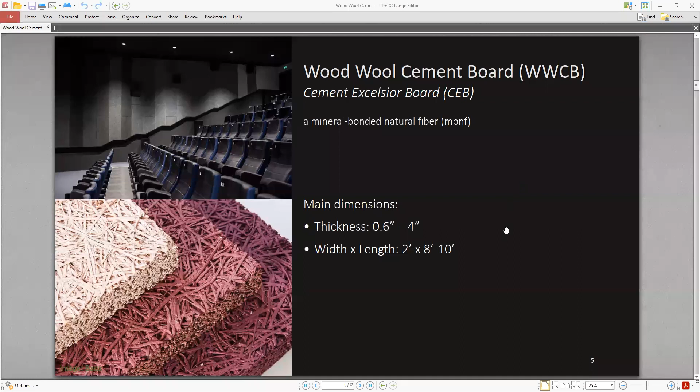The inputs, what goes into the product, are very simple. It's just these wood strands, ordinary Portland cement, and water, and that's pretty much it. It uses small diameter trees between 4 and 11 inches, and the length between 6 and 15 feet. So it's all material we have in vast abundance of, and often don't know what to do with it.

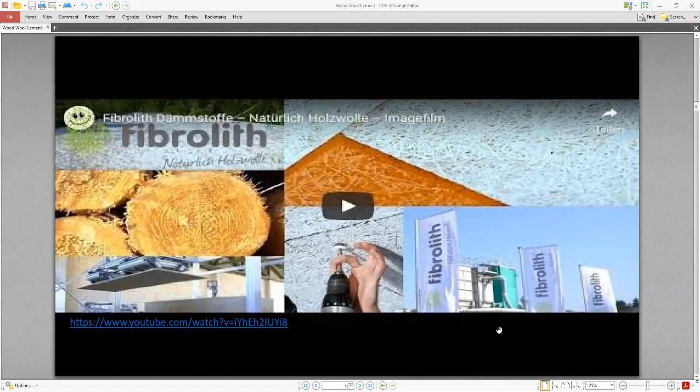There is a nice YouTube video, I'm not going to play this now, I'll probably put the link in the chat box later. It's from a German company, but there's no text, it is all subtitled, and it'll show you the process a little bit.

These are some slides showing what goes in and what comes out. Starting top left, the logs are delivered. As you can see, it's a cut-to-length method, which is the most common method used in Europe. The whole tree isn't as much of a thing there.

Then it goes through a debarker, and the logs get stored out in the yard for another 6 months or so, not only for humidity and moisture content to adjust, but for tannins and sugars to settle and cure, because that affects the binding with the cement.

After 6 months, it goes back to a factory, gets cut into these 2-foot long pieces, and goes into a shaving mechanism, and this wool-like material comes out. Maybe you've seen it as packing material - sometimes fancy wine bottles are cushioned with this rather than plastic popcorn or newspaper. So that's where many people here have seen it before.

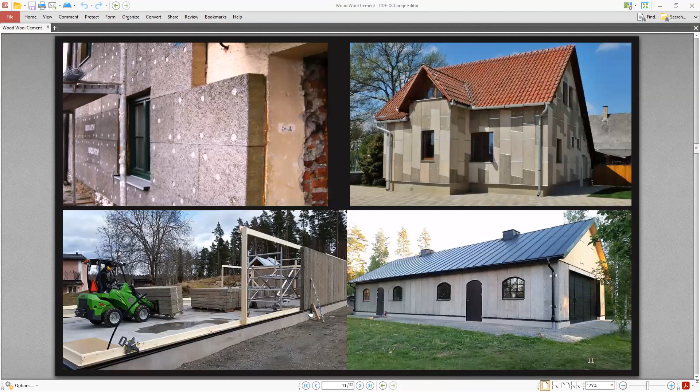Another application is on the exterior. The top row is a remodel of a building, I think 150 years old, that needed to be retrofitted and upgraded in terms of energy efficiency. They used these panels and added some EPS foam for additional insulation, just put it on the outside as siding. Because these individual wood strands are encased in cement, that's what makes them water resistant.

That's why it can be applied to the outside of a building without any other siding. The lower part - they built a whole structure, more a garage than anything, just out of these 4-inch or 6-inch thick panels.

Here are some properties I mentioned earlier. The thermal insulation R-value is 1.87 per inch. It has a relatively high specific thermal capacity, which means thermal inertia - if a space heats up, or if you use it in a building and the outside gets hot, it takes a longer time for this material to warm up or for the heat to get inside the building.

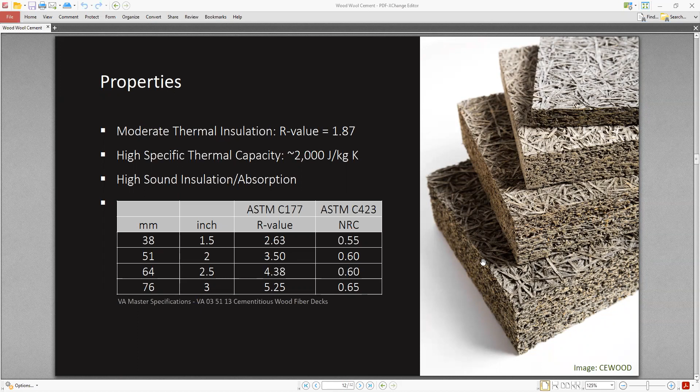So these were the thin panels up to 4 inches. Then a manufacturer in Sweden developed full wall elements. If you're familiar with how CLT panels look, how they're made, assembled, and how they end up on a construction site, this looks very familiar, right? These panels are cast at the factory and then transported to the site and assembled - between a foot and over 1.5 feet thick, length up to 20 feet, and width between 9 and 10 feet.

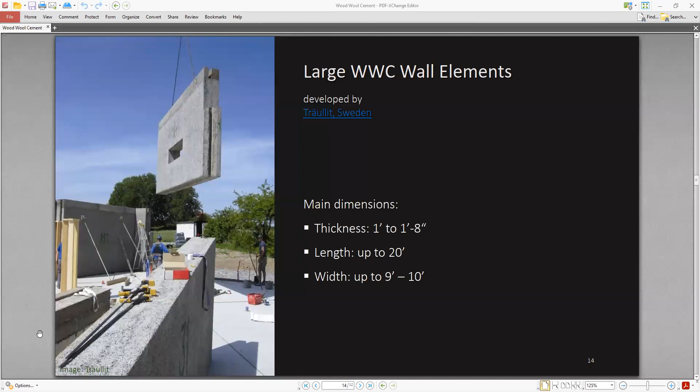This is what it looks like. Again, if you've seen CLT panels, or SIP structurally insulated panels - that's the sandwich of plywood with EPS foam in between - these elements just get delivered to the site and then assembled. So you can have a building on a foundation within 48 hours, with a roof on it. This is how it comes together. I don't know if you can see my mouse pointer here.

So these are the panels, and this gray bar at the top and these columns, that is concrete. When architects and engineers spec these buildings, they base their entire load calculations just on this concrete ring beam and the concrete columns. So they don't assign any structural load-bearing value to the panels themselves, which should make it easier for engineers to spec these things, and hopefully getting it through building codes in the US, because concrete is a common material people know here. So it's designed based on the concrete, and the panels are calculated just as thermal and acoustic insulation, but they have many more properties.

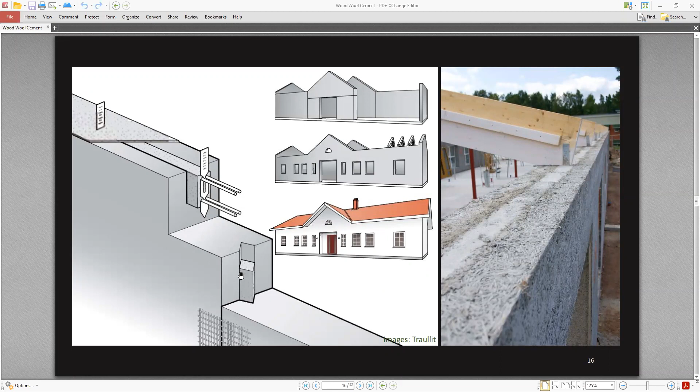This is, again, how things go together. Top left, that's a building where the wall elements are what we just saw, and then there are roof boards as well. You can see little dowels with the red dot in the middle. In that combination, they reach a 54 pounds per square foot roof load capacity. That's a lot. They had this example of Mr. Gobi, the elephant - they put him on there, almost 4,000 pounds, put on one of these roof boards, and it held up.

So for places that have high snow loads - we don't get it much here, but my friends up in Montana do. If we go up in the Sierra Nevada here, up to Truckee, they get multiple feet of snow every winter. So you have a product that can make up the walls as well as the ceiling and the roof. The span between the rafters is not the 16 or 24 inches we have in conventional construction - that's between 6 and 8 feet. So it comes together much faster.

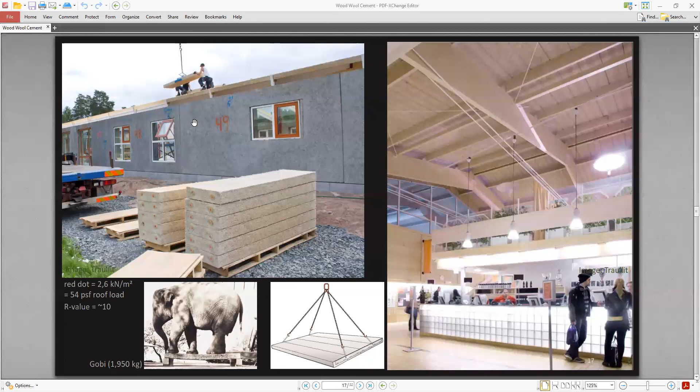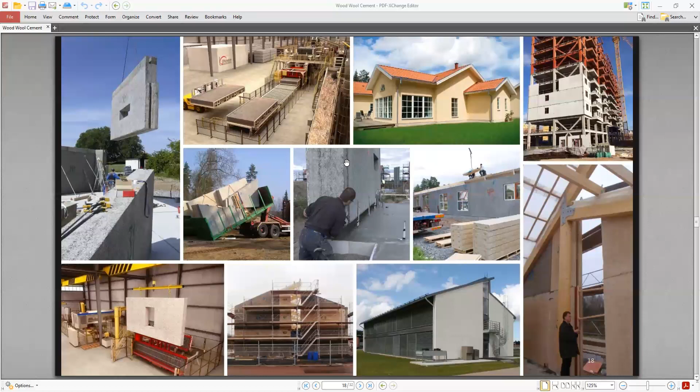A few properties - because the wall elements do not exist here, I had to borrow some fire classifications from Europe and Canada. But it is fire resilient. The flame spread index and the smoke developed index - these are ASTM US standards - and they tested these ceiling and wall panels for fire resistance.

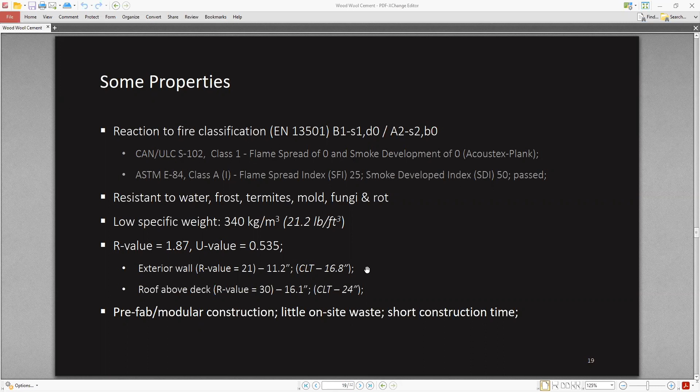I added some for comparison at the bottom there, the R value again, and this, looking at the California Title 24, that's the building energy efficiency code - an exterior wall with this material would be 11 inches thick. If you want to do the same wall with CLT, it would be almost 17 inches. So if you want to use a lot of wood, that might be a good thing. But again, CLT utilizes mostly mature timber rather than the 4 to 6 inch or 4 to 11 inches diameter material.

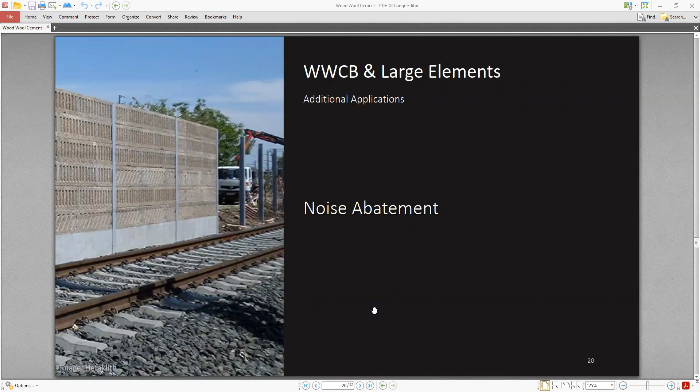So that was the whole building, residential and office building application. But they use it for noise abatement as noise barriers along highways as well. That's the stuff you see when you drive along the highway and there's a town behind it, and you don't want to create too much nuisance for them with the noise from the highway, or in this case, a railroad. That's when they built these walls, in all sorts of shapes and sizes and applications. Again, because it's cement coated, because it's water resilient and weather resistant, that's why they can put it in between the railroad tracks to mitigate noise.

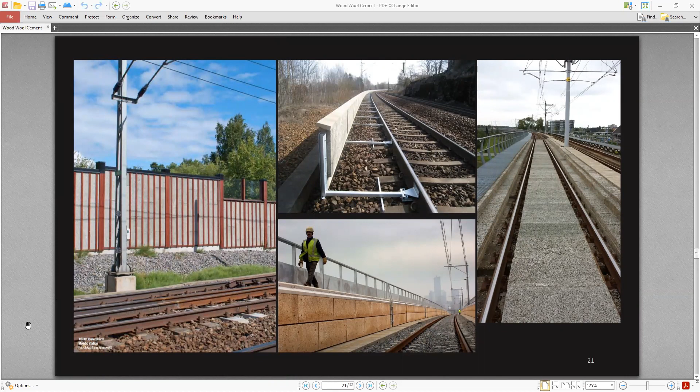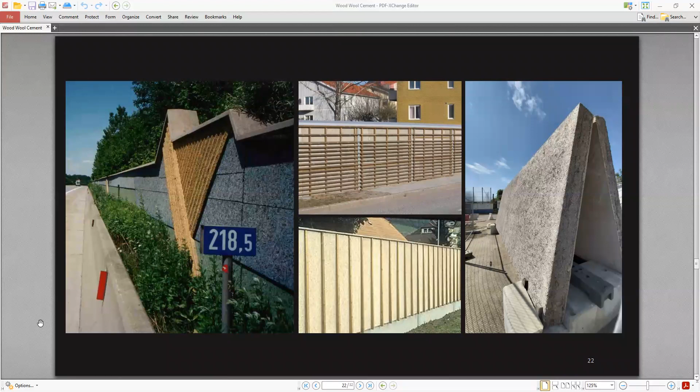Just a few more examples - again, one can go fancy on design. On the right side, this A-frame or A-shaped example - this is fairly new. That's a contractor in the Netherlands that has developed this concept. He's about to patent it right now. So based on that, some more examples.

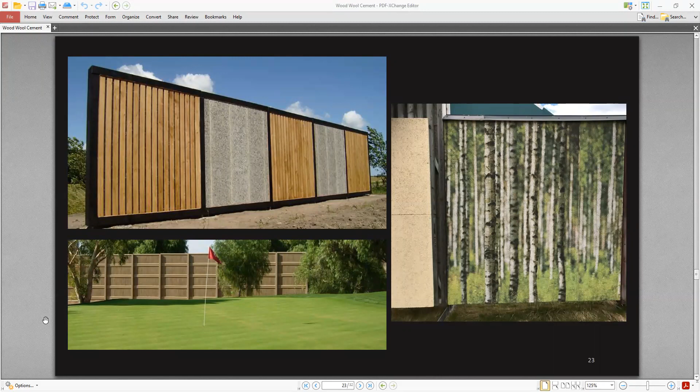So I did some math and thought, well, California installs about almost 60,000 linear feet of noise barriers every single year. Based on these calculations, a plant running at full capacity with one shift could produce all these panels in one year.

Now, when I bring this material up to people, they often say, well, cement is bad. I said, well, cement is not bad. I know cement has a high carbon content, emission content, because it takes a lot of energy in cement kilns to make the cement. Is it? Yes, that's true, but it depends on where that energy comes from. Does it come from coal? Does it come from gas? Does it come from solar and wind?

Then that equation changes. In the context of this comparison, right now the entire 60,000 linear feet of noise barriers in California are built out of solid concrete blocks. So if we can substitute some of that cement, some of that concrete with locally grown overabundant small tree material, still add some cement to it, we can have a similar effect, maybe even better, because these walls do not bounce off noise as regular concrete walls do.

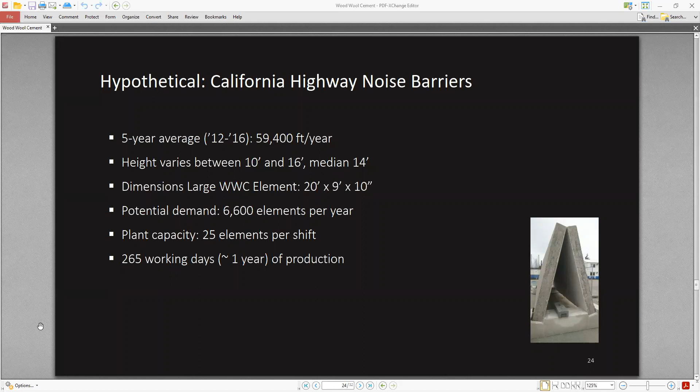So that's one of my pitches with them - I'm talking with Caltrans here, the Department of Transportation, to consider that, trying to find markets for this product.

How much goes into a plant? Not a whole lot. And when I talk to Forest Service people, they would rather see a plant that takes in 100,000 tons a year. I said, yeah, that's not this.

It takes about 20 tons of wood per day per shift, so over a year that's about 6,000 tons. It's peanuts, it barely makes a dent. But I think with that size, it might lend itself to be more distributed into smaller communities and closer to the source. You don't have to have a centralized plant where you have to ship a lot of material in, but you could have this more distributed setup.

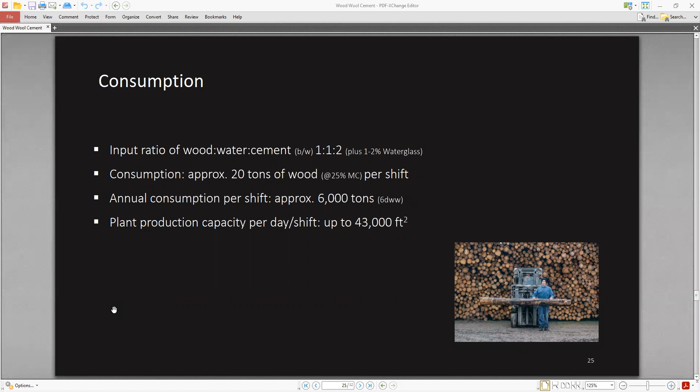So they have these documents. For some reason, they do not exist to that extent for similar materials here. So if you look for an EPD for CLT, for example, they usually just go to the factory gate, and they do not encompass the whole chain from production to the end of the life cycle. Where does the material go and what happens? Transportation costs, emissions, installation, and such.

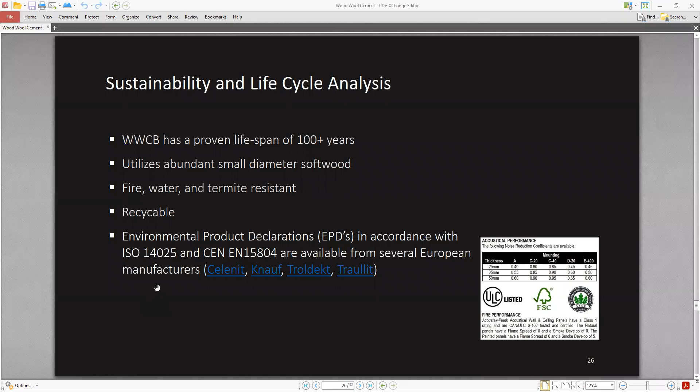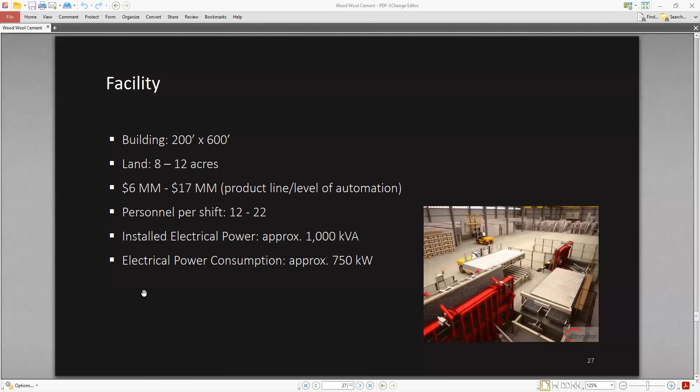So where does that tie into a variety of the issues we're dealing with in this group and on the state level? One is resilient forests and landscapes, because it does utilize underutilized small diameter trees, community hardening, home hardening. As I mentioned before, this material is fire resilient, not fireproof, but fire resilient.

For the economic stimulus, between 12 and 22 personnel per plant. It plays well with mass timber. It's not a substitute - it does not have the structural strength as mass timber, but it has other qualities and characteristics that CLT does not have.

So if you build an entire structure out of CLT, it's not quite an echo chamber, but it's close. And you still need siding and cladding on the outside, because I don't think many people would just leave CLT mass timber exposed to the elements. And it would be a good combination with other wood product manufacturers - that's where the co-location comes in, or the concept of the wood products campus.

So now the big question, why is it not being used more in the US? Currently, there is no manufacturer in the US that makes this material. There's one in Ohio that makes a similar product, but they use only aspen, and a different binder that is not as water resilient.

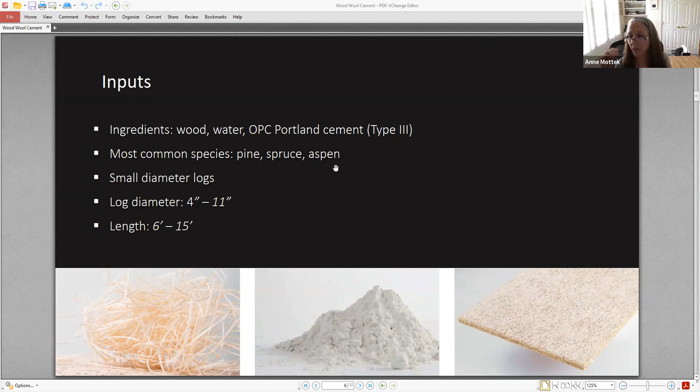Martin, I was just watching a piece yesterday on the news about how the wildfire smoke is traveling, to New Jersey and New York. If you think about insulating buildings, that might be a selling point honestly. It was interesting that one of the folks said something like, even though you think we all breathe the same air, we can't get away from it, but people with money, you'd be amazed what they can do. They can build buildings and do things where they don't have to always share the same air, but that insulation quality could be a selling point.